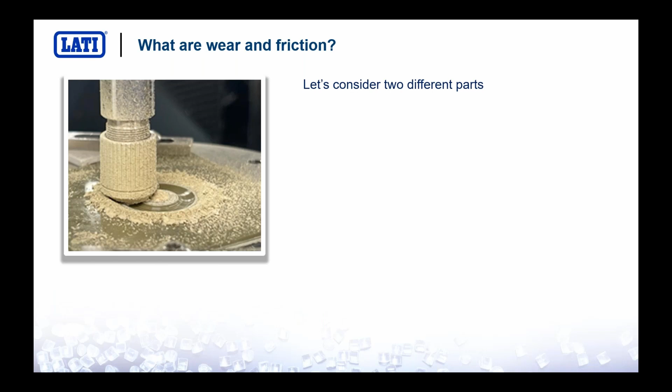So what is wear and friction? Let's introduce it as a scientific phenomenon. Consider two planes sliding one against the other. You have to put them in contact and in relative motion, so one slides onto the other. Let's suppose we apply a force pushing one onto the other. We can experience and define friction as a non-conservative force opposing motion and dissipating energy as heat.

We can experience this in our all-day life—when we rub our hands, we can feel the heat from sliding one onto the other. That is friction: it dissipates energy as heat, and it is a non-conservative force. What does non-conservative mean? It means its work is not related only to the starting point and end point, but also to the way the force works, to the amount of movement this force is actually doing.

Wear is a dissipation of mass—not a destruction, of course, but a dissipation of mass—meaning you actually remove some mass because of the aforementioned phenomenon.

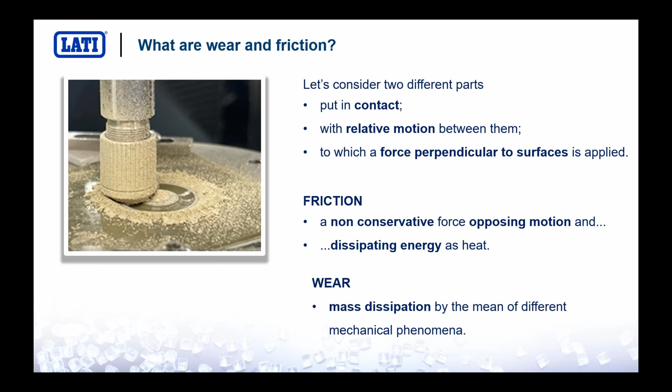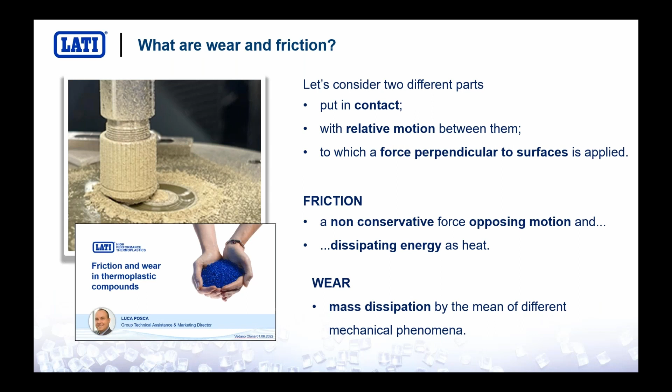If you have any interest in going more into detail about friction and wear, I strongly encourage you to look at our previous webinar from last year, 2022. I personally took care of that one, where we gave a better introduction to friction and wear in thermoplastic compounds. But today this is not the topic, so it will just be a very short introduction.

Let's try to better understand what friction is and how we can solve any friction-related problem. If we zoom into the surface of the two sliding parts—the orange one and the gray one you see here—you will see that any kind of surface, even the flattest one you can imagine, actually shows some roughness. This roughness is the source of the issue.

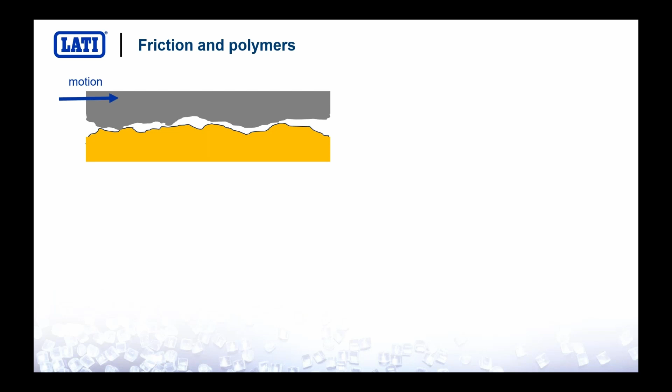If we imagine putting the gray part into motion onto the orange one, and we apply some vertical force, indicated with Fn, which could be the load or the pressure, we will experience a resistance to motion—that is the Fr indicated there. The ratio between the resistance to motion and the vertical force is defined as the friction factor, indicated by the Greek letter μ.

The friction factor is a pure number, whose value is below 1, of course. Normally it's something between 0.4, 0.5, 0.6. With some plastics, it can go down to 0.1.

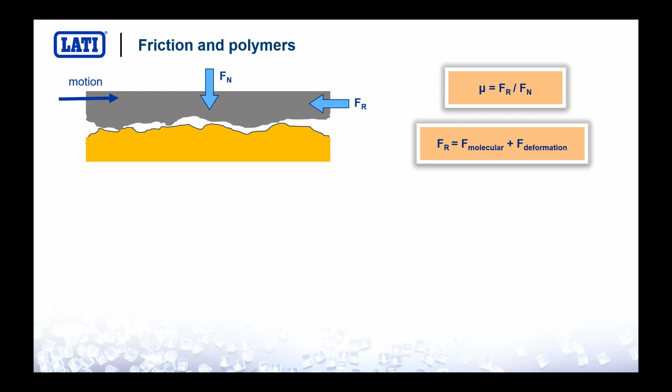If we take a closer look at resistance to motion, we find it is achieved by means of two major contributions. The first one is due to molecular interaction, and the second one is due to the plastic deformation of all those peaks and crevices you see on rough surfaces.

The molecular contribution is due to molecular interaction, meaning the two materials tend to stick together because of electrostatic forces, van der Waals forces, and any kind of electrical interaction between the molecules. This gives rise to the so-called adhesive contribution, meaning the two parts tend to stick together.

The other contribution is related to material deformation. The peaks and crevices come into contact with one another, and you have to spend some work, some energy, to deform the peaks. This creates resistance to motion—this is the mechanical contribution, and it is extremely important in both wear and friction phenomena.

So once we understand where friction comes from—mechanical and adhesive contribution—how is the friction factor generated? The friction factor depends on a lot of different parameters: normal force, so pressure, the roughness of the surface, the relative speed, temperature of the environment, thermal conductivity, and so on.

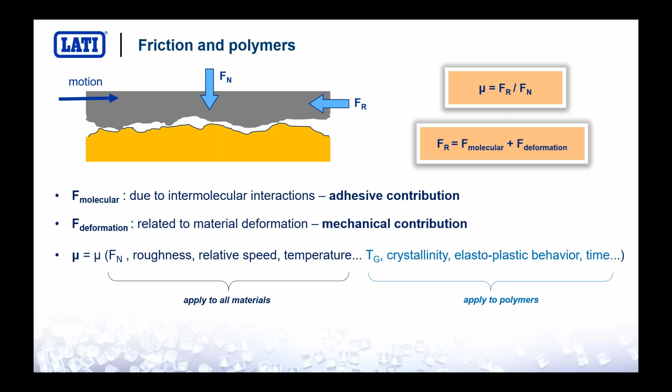So you can easily imagine how hard, difficult, and unreliable all the tests we make to measure friction can actually be. You see how many different parameters we have to control in order to provide some kind of reliable description of friction.

One question can anyhow be easily answered: what is the perfect material? How could we conceive a perfect material, how should it work? For sure, we understand that the perfect material must have very, very low adhesive behavior—it must show very poor chemical activity. And it should be a material that we can easily deform, easily shear. This could be the perfect material.

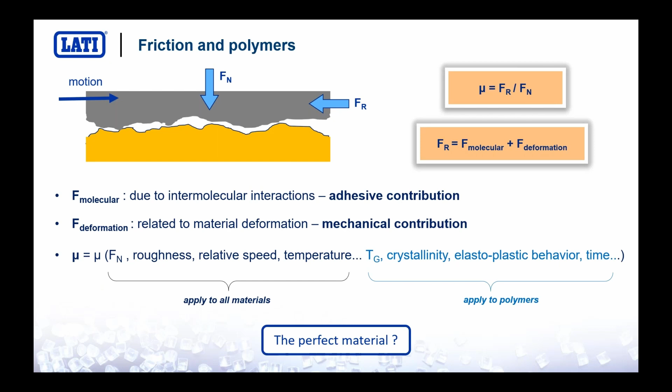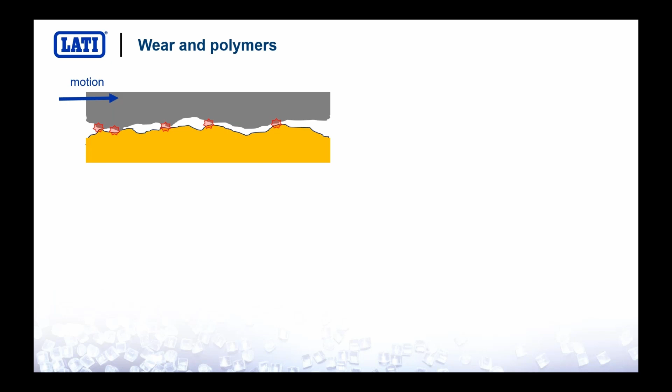Let's move to wear. Wear is more or less originated by the same phenomena. We look at our surfaces, apply motion as usual, and we see that in some areas, those peaks and crevices and crests get in touch. They weld onto one another and break as the motion forces the gray part to slide onto the orange one. We can evaluate the wear rate as a proportion including friction factor.

Wear rate becomes lower as the material gets harder and as elongation at break and stress at break become higher. So we can say a perfect material should have a very low friction factor, should be hard, and should require a lot of work—related to elongation at break and stress at break—to be broken.

So we can also introduce an adhesive component of wear, related to the tendency of the molecules of the gray part and the orange part to stick together. When they weld onto one another, they are forced to break as soon as there is motion. Then there's the abrasive component of wear, due to the so-called third body—a very hard body rolling between the two. Then we have fatigue wear, promoted by the poor capability of the material to resist applied cycles and stresses in cyclic applications. And then corrosive wear, promoted by the environment.

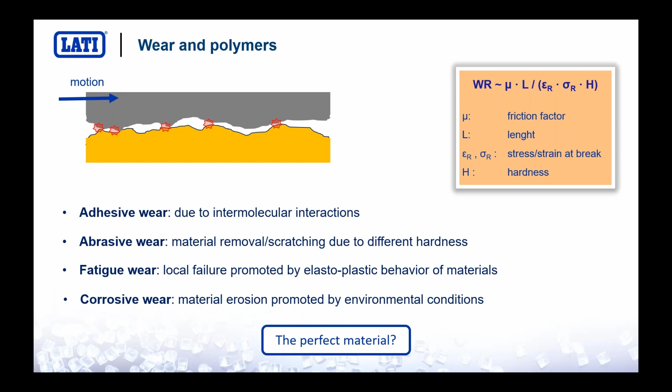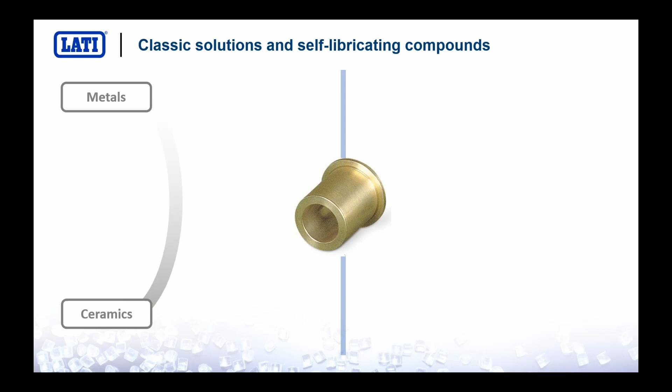Now, what are the solutions that today we can find on the market? We have the classic solutions: metals and ceramics. We can improve the behavior of metal and ceramics by adding some lubrication or specific coatings, very hard coatings like silicon carbide or aluminum nitride and so on.

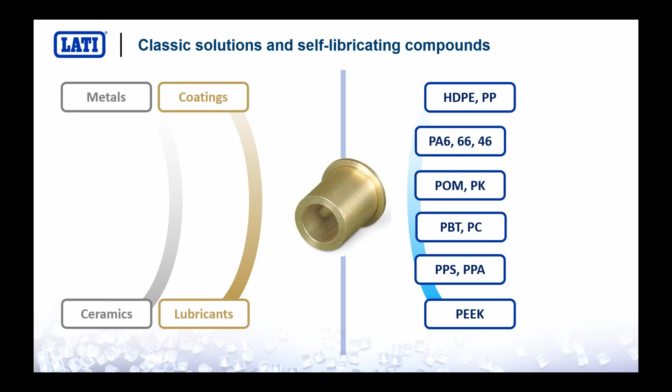As LATI, we work on the other side: the side of plastics. So we select very intrinsically self-lubricating plastics like PEEK, acetal, polyamide, PBT, or polyethylene, and we introduce some extra fillers which improve and boost the tribological performance of those plastics, like graphite, molybdenum disulfide, silicon oil, carbon and aramid fiber, and PTFE. PTFE is actually the best performing additive that we can imagine.

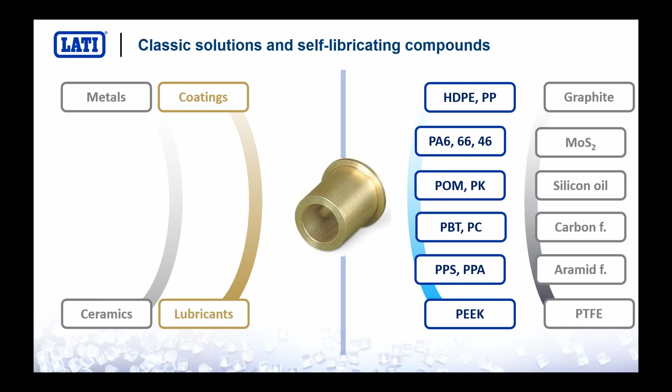Now we are going to find out why. Let's meet this guy, let's meet PTFE, and let's try to understand why PTFE is so well performing. PTFE is a very interesting molecule coming from the polymerization of tetrafluoroethylene. Tetrafluoroethylene can react with a very highly exothermic reaction, meaning that the polymer born after this polymerization reaction will be extremely stable.

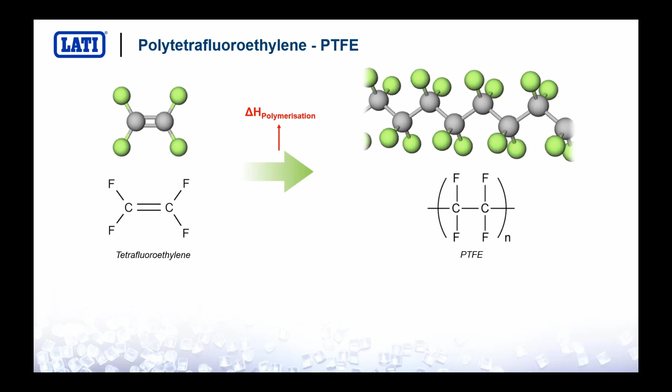The molecule in itself, here it is, PTFE, polytetrafluoroethylene, is a very, very, very interesting molecule. It is a very big one, very big, very heavy. Just to give you an idea, the molecular weight of PTFE is 100 times higher than the molecular weight of nylon 6,6, meaning that you have a very huge, very bulky, very long molecule.

You have a very high crystallinity index. PTFE is born with 95%, which is then reduced down to 50% during the subsequent processes. But in any case, it is a very highly crystalline polymer because of its nature. It's a very linear and homogeneous molecule, and it's very high density. So it's very heavy, it's very big, and it's very crystalline.

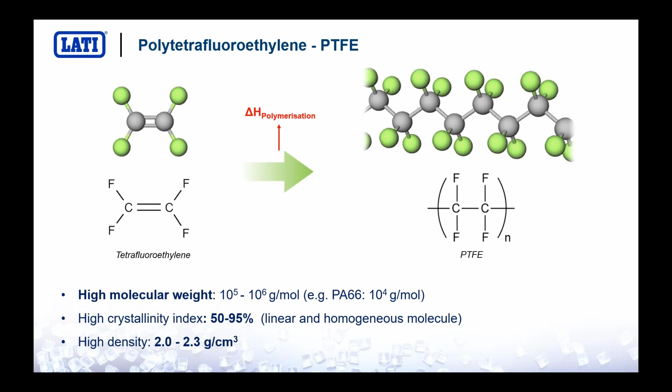But this is not enough to understand why PTFE is such an excellent performer. We have to look a bit closer at the bonds of the PTFE molecule. Let's jump into the PTFE molecule.

If we give a closer look at PTFE, we will find out that the carbon-carbon bond, the covalent bond between carbon atoms along the backbone of the PTFE molecule—the gray spheres you see there—is extremely stable. It requires about 350 kilojoules per mole just to be broken. But it is nothing when compared to the carbon-fluorine bond. The carbon-fluorine bond is among the most stable covalent bonds that you can find in nature. Its energy is higher than 400 kilojoules per mole, and this is an extremely short and stable chemical bond.

It is also extremely polar because fluorine just needs one electron to be perfectly stable, and it takes this electron from the carbon atom, giving you a strongly polar dipole, as we say. What does this mean? It means you have a very short bond with very high energy needed to break it, and this will lead the molecule to be absolutely stable—even if you try, it is extremely difficult to break it.

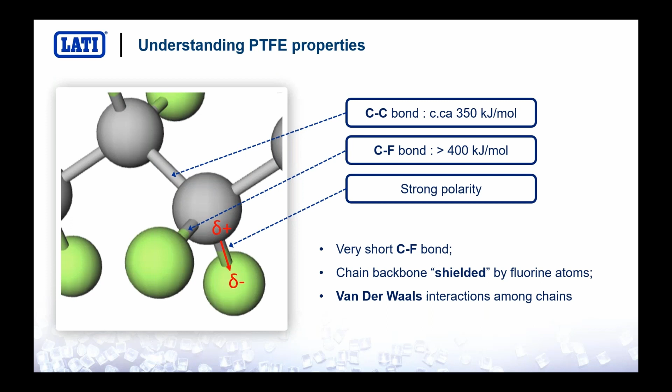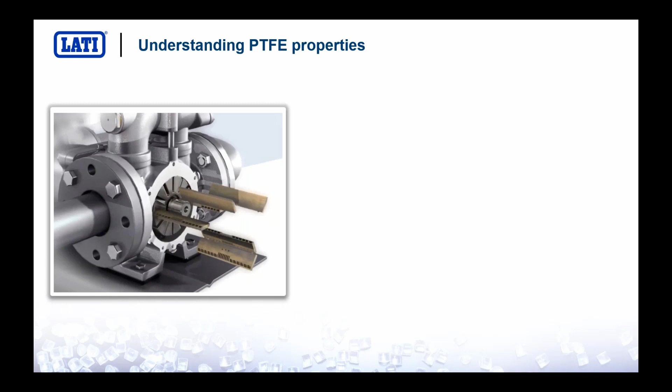Now we have understood that the chemistry of PTFE is the reason for its outstanding performance. What does it mean? When you have such a stable molecule, you will have an extreme chemical inertia. What does chemical inertia mean? It means there is no way to break it, no way to stick onto it, to glue it, to paint it, no way to overmold it. Nothing can actually stick to PTFE.

There's a very low surface energy, so it's very hard to wet it, very hard to apply any glue or any other chemical substance. And it has a very high thermal stability, because the chain of the PTFE polymer is extremely stable in itself, it does not want to break. This means the product will have a very low friction factor because we almost have no adhesive force, and a very, very low amount of work to shear it. So it's a very weak solid.

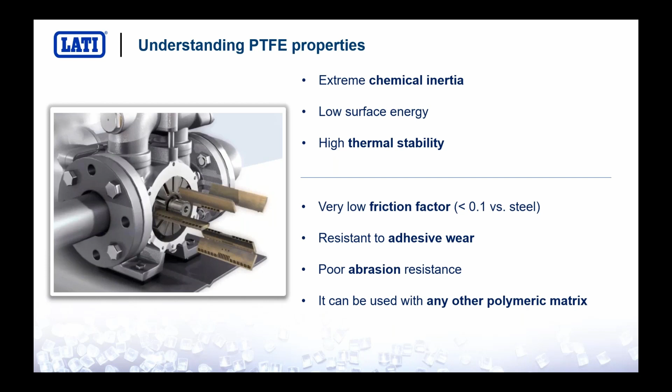It's a very weak solid. It is extremely resistant to the adhesive component of wear, but it is not resistant to the abrasive component of wear. But all in all, thanks to its overall properties, it can work very well with any other polymeric matrix. So you can actually disperse PTFE in any polymer, from polypropylene to PEEK, and you will always have outstanding performance.

Now let's try to understand how it works in the compound. First, I have to focus your attention on a collateral effect of PTFE. In case you want to think about replacing PTFE-based thermoplastic compounds with non-PTFE-based thermoplastic compounds: PTFE has a huge effect on shrinkage. Remember this is absolutely important.

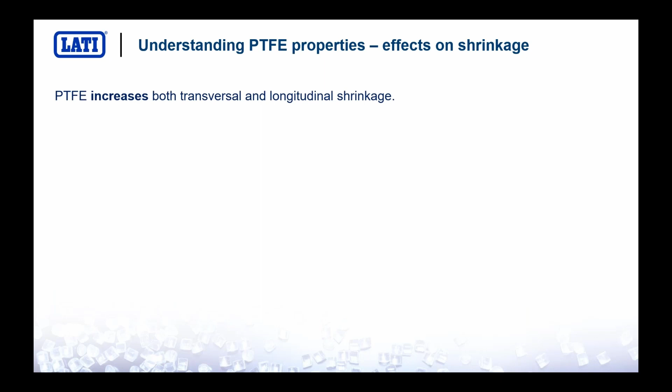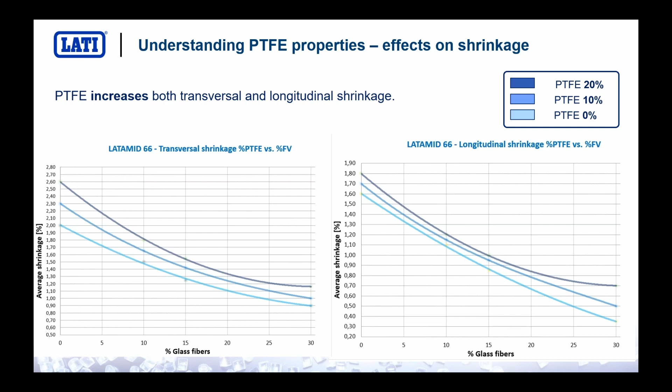PTFE increases both transversal and longitudinal shrinkage. The more PTFE you put in your compound, the higher the difference will be between unfilled and PTFE-filled compound when it comes to shrinkage. So I would say forget about replacing one-to-one PTFE-based polymers with PTFE-free solutions, because you will have bad surprises when it comes to shrinkage. But this is just a technological issue. What is really important to us is to understand how PTFE actually works in our compounds, so we can understand how to replace it.

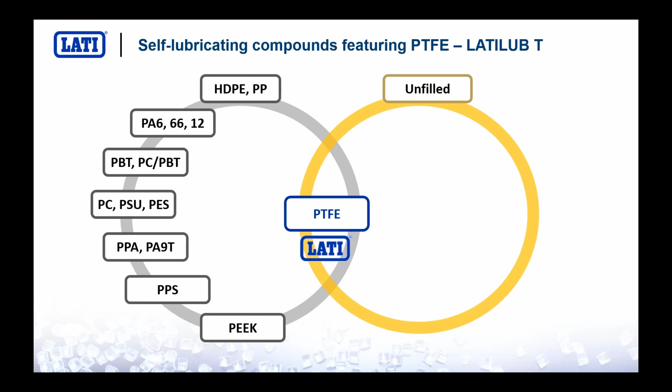Today, LATI produces a wide range of PTFE-based thermoplastic compounds. We use any kind of thermoplastic-based polymer, from polyethylene to PEEK, and we use PTFE with a huge amount of different additives. We use it unfilled, with silicone oil, glass fibers, carbon fibers, graphite, aramid fibers, and ceramics. If you check our website, you will find hundreds of so-called LATILUB compounds containing PTFE as a main self-lubricating additive, because it works absolutely fine. Today you can rely on plastics that can be used from 80 to 300 degrees C, featuring PTFE as a main self-lubricating additive.

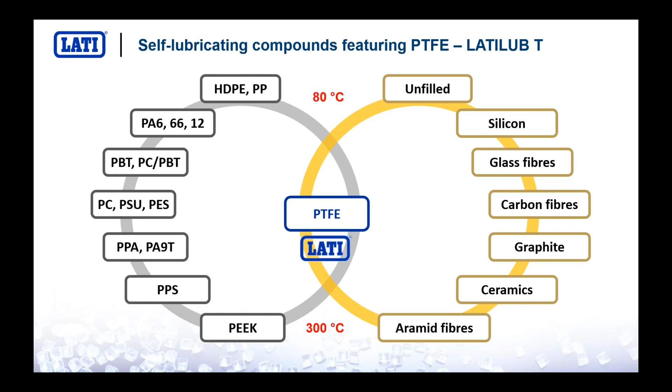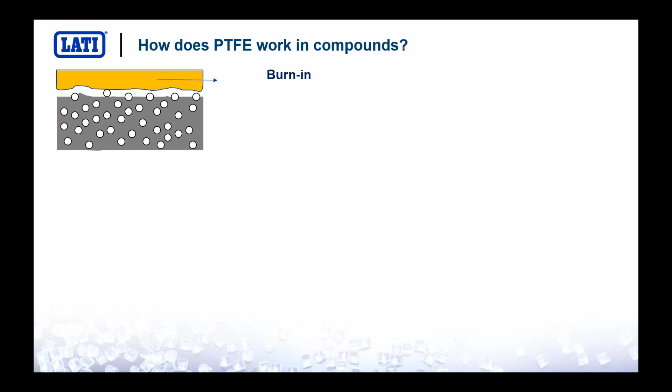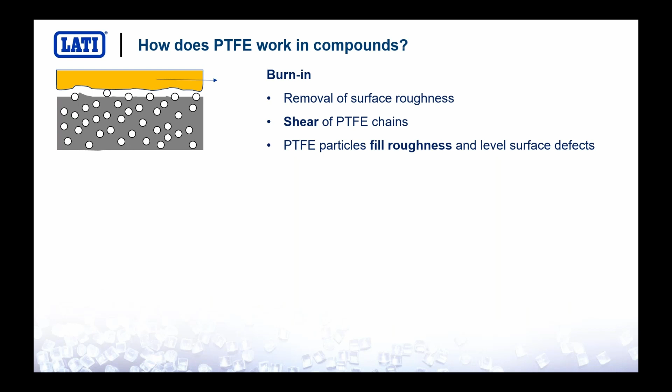At the beginning, you have some burn-in phase. The first step is the removal of surface roughness - you just remove all the crevices, peaks, and valleys on the surface. Then you start shearing PTFE chains. Remember, PTFE chains are kept together only by very weak van der Waals forces because of the very high chemical inertia. So you can actually shear the crystals of PTFE, shear the molecule, and laminate it onto the surface. You can shear it and move it into the valleys, leveling the surface just by rubbing PTFE onto the surface because of shear.

If we zoom into one of those white bubbles, you will see that because of the mechanical stresses, you can actually promote chain breakages in the PTFE chains. What happens when you break the chain of a polymer? You create radicals - extremely active chemical species, prone to react very quickly - and these chemical species will react with the orange part. This means the PTFE radicals will stick onto the orange surface, promoting the so-called film transfer.

So you will have PTFE not only on the surface of the gray part, but also on the surface of the orange part. You will have PTFE on PTFE with extremely oriented chains. This solution works great for high loads and low speed, and works fine from 5% to 20% of PTFE in the thermoplastic matrix. That's exactly how PTFE works: very poor adhesion and film transfer. These are the keywords.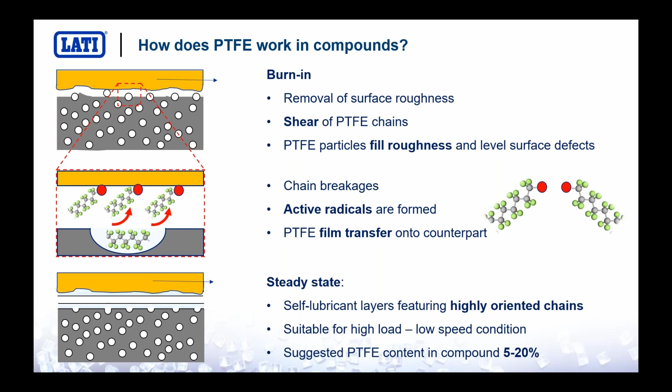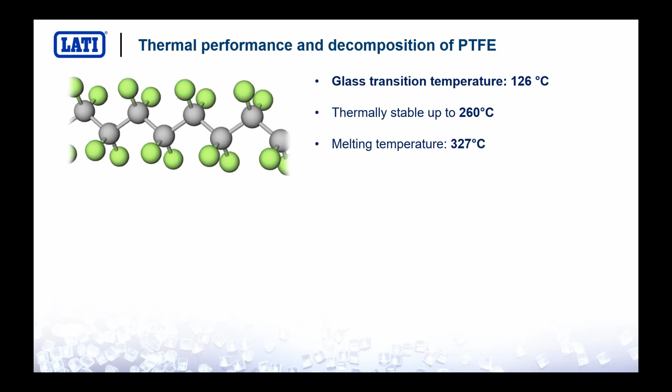Now let's come to the bad news. What happens when you heat up PTFE? I told you the molecule is extremely stable. That's exactly the problem. PTFE has a glass transition temperature of 126 degrees C. It's stable up to 260. It should melt at 327, but actually it doesn't melt because of viscosity. But from 350 on, it starts thermal decomposition, and that's the problem.

You have a full depolymerization above 650 degrees. And what happens when PTFE decomposes? When PTFE is broken because of temperature, it will release a lot of very nasty substances.

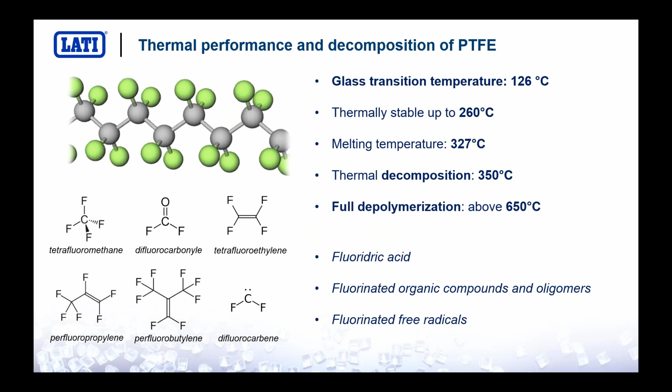First of all, fluoridric acid, which is extremely corrosive and extremely dangerous for people's health. Then it will release a huge amount of very nasty oligomers, so-called oligomers, meaning small molecular, fully fluorinated oligomers. Here are some of them. And of course, it can release also fluorinated free radicals, which are nasty and extremely reactive as well. This is the problem. These substances are the bad news.

What are the so-called PFAS then? The PFAS are just what we have been talking about, the so-called poly or perfluorinated alkylic substances. It's just the amount of guys that we have just met in the slide before. I will introduce you the first PFAS, the perfluorooctanoic acid.

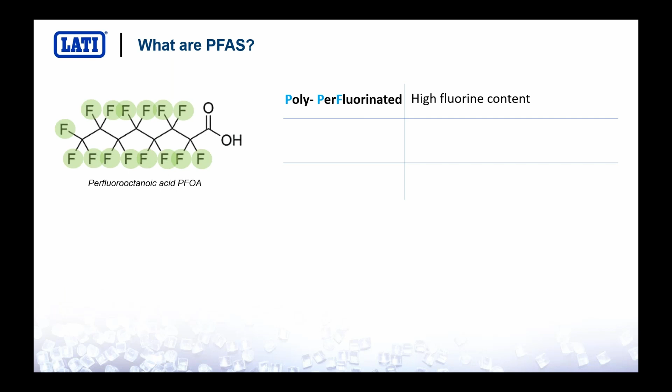Perfluorooctanoic acid is a fully fluorinated organic acid, so it is poly or perfluorinated, meaning high fluorine content, alkylic substance, meaning that the main chain is coming from an aliphatic hydrocarbon, and substance, meaning that it will be defined as such even if it is alone or in combination with other substances.

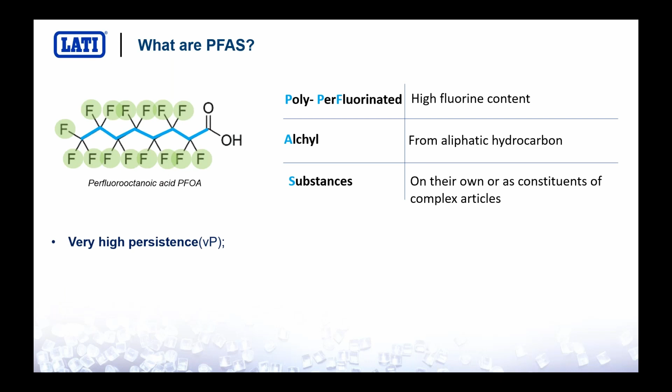What are the main problems related to these byproducts of PTFE degradation? They are extremely persistent, meaning it is almost impossible to destroy them because of their inherent extremely high stability. They lead to bioaccumulation. They are very mobile. You can find them everywhere all over the world. You can actually find it in the North Pole. They are extremely toxic and ecotoxic, and they have the so-called ubiquitous presence, meaning that they are everywhere.

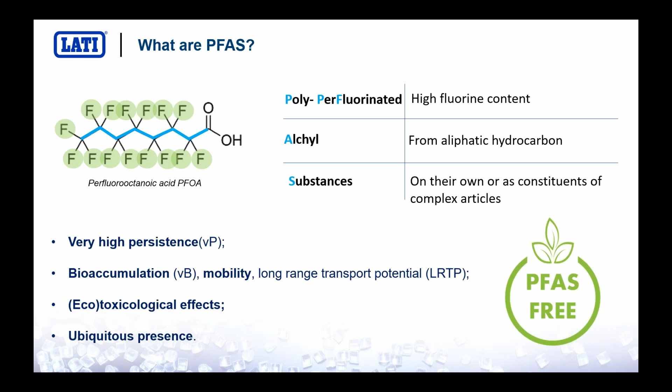So you have nasty substances, very toxic, extremely stable, very mobile, that can be found everywhere. And that's the reason why today we are asked for PFAS-free solutions. Very nice question, very difficult answer. Now let's give a look at the status, the state of the art of the rules.

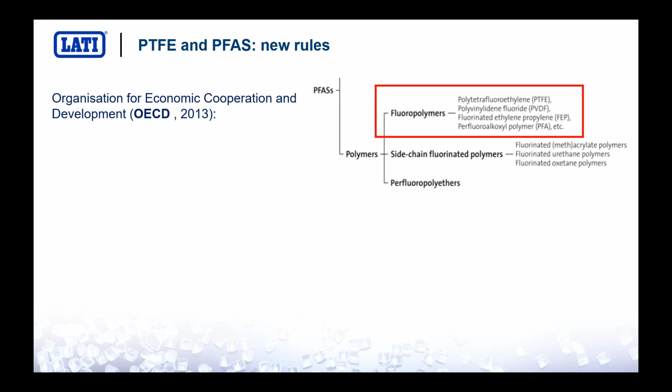Fluorinated polymers have been identified as PFAS in 2013. You can see this is one of the branches of the diagram describing what is PFAS, but you can easily see that fluoropolymers are identified as PFAS. So PTFE, PVDF, PFA, and so on, ECTFE, and so on. All these fluorinated polymers are PFAS.

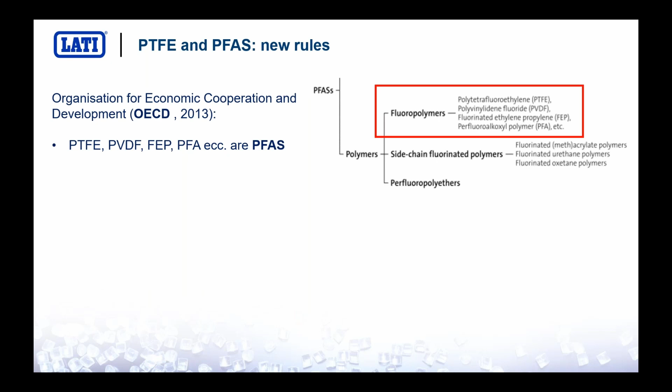So what is going to happen to perfluorooctanoic acid is more or less happening also to PTFE. PFOA was introduced in the substances of very high concern list in 2013, 2014. Then there was a new regulation in 2019. In 2020, there was the first limit of perfluorooctanoic acid content in PTFE, just to give you an idea, 25 parts per billion. And today we have 5 European states pushing for a further restriction covering a wide range of PFAS, including fluoropolymers.

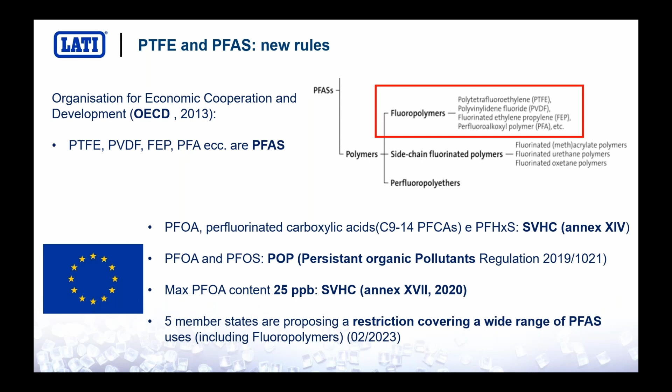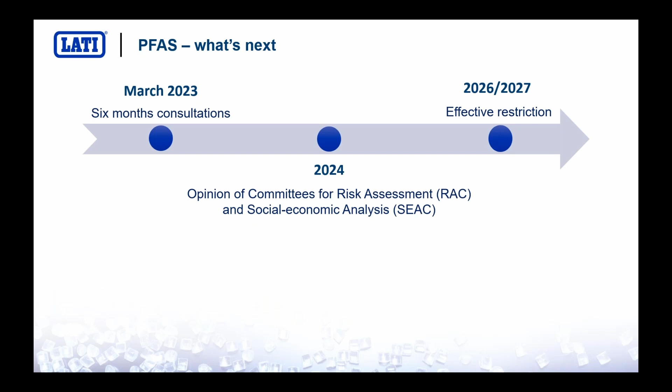What is the roadmap? The roadmap is very tight. March 2023, we had the first 6 months of consultations, which have just ended in September. Now in 2024, there will be an assessment of all socio-economic issues related with the ban of fluorinated polymers. But between 2026 and 2027, it is very, very keen that there will be the introduction of restrictions on fluorine polymers.

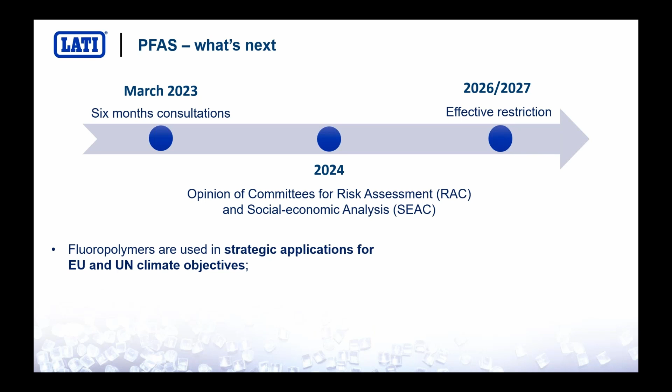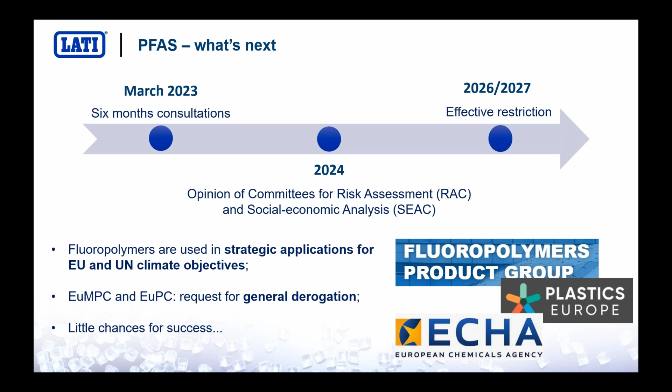Of course, there is lobbying. We are trying to make people understand that fluorinated polymers are extremely important for many strategic applications for Europe and UN climatic objectives. So we're actually lobbying to try to convince these people that fluorinated polymers are very hard to replace, but the hope for a general derogation on fluoropolymers is really very low. There is really a little chance for success. So by 2027, we are almost sure that PTFE will be forced to be removed from our plastics. And this is a big issue.

Now let's make our ideas clearer. Let's imagine that we have to replace PTFE today. First of all, we have to understand what is needed for plastics to create a successful self-lubricant polymer. We need extreme chemical inertia. First of all, we need a plastic, an additive which is not prone to react with anything.

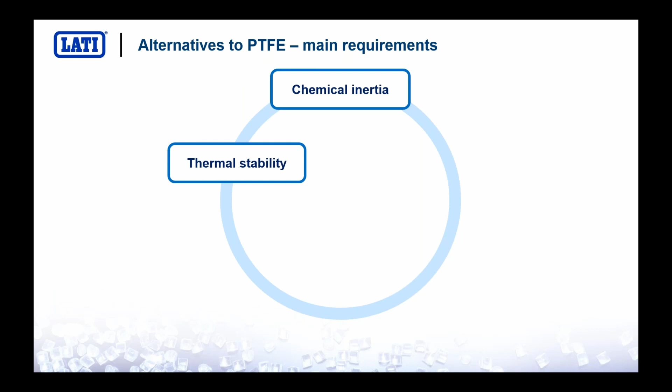Then we need thermal stability. We need good processability. We need good viscoelastic and mechanical properties, of course. And then we need an acceptable price versus performance ratio. I put this as the last problem, but you know, for many situations, it's the first issue.

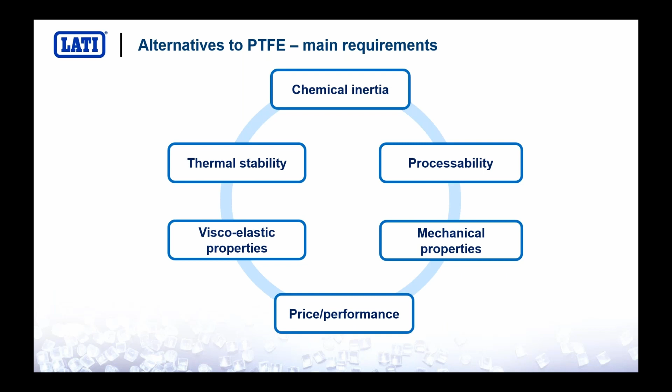Let's see what are the closest solutions. I'll start with the most popular and easiest one, already being used by LATI and many of our competitors for a few years: ultra-high molecular weight polyethylene. It's a polyethylene with a very big chain, a very funny name, but with a very high molecular weight and very high crystallinity. Its density is lower than PTFE, but it also shows outstanding chemical inertia, so we have most of the properties of PTFE.

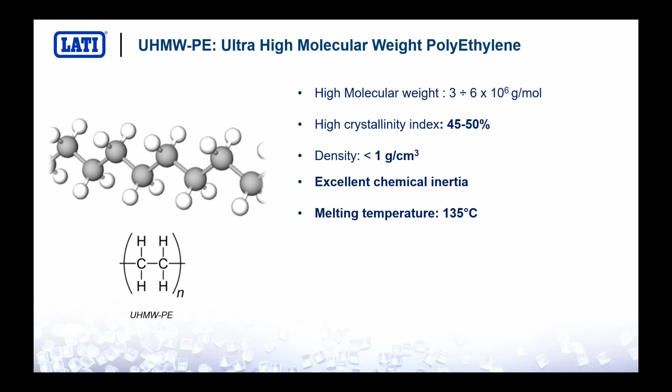What is LATI doing? LATI has already been compounding ultra-high molecular weight polyethylene for a few years. We have solutions based on nylon 6, copolymer 6.66, polyolefins, polycarbonate, polyether sulfone, and PPS. First, bad news: we have a much lower number of resins where LATI has tested ultra-high molecular weight polyethylene as working. I repeat, this is LATI's experience, not global experience.

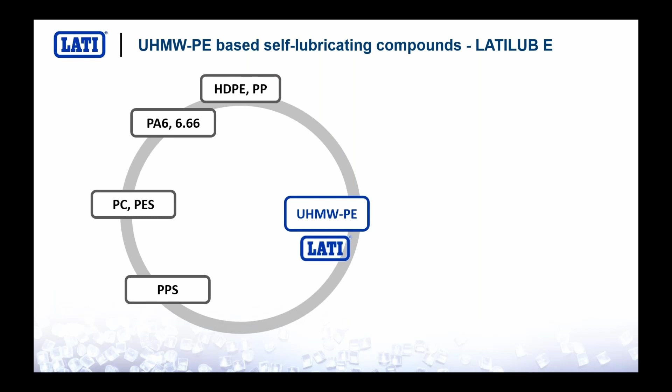From a filler point of view, we've worked with ultra-high molecular weight polyethylene in silicon oil, glass fibers, carbon fibers, and aramid fibers. We're now exploring other synergies, but the combinations are much lower than those available for PTFE. Also, the available maximum temperature of these self-lubricating plastics is lower, because it's very difficult to properly disperse ultra-high molecular weight polyethylene in high temperature plastics like PEEK, PPA, or polyphenylsulfone. It's very difficult to achieve proper dispersion of this additive, and this leads to poor performance as a self-lubricating additive.

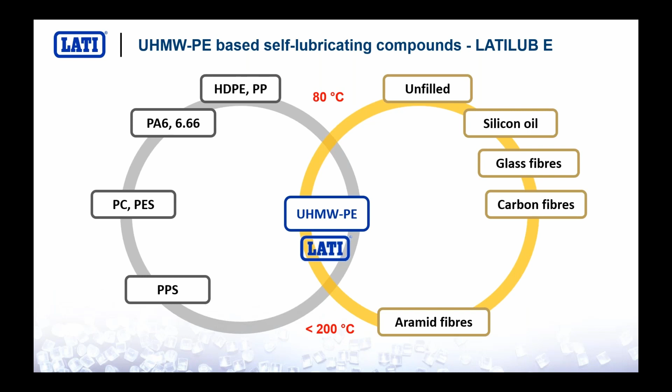Let's look at the numbers. I compared very similar formulas - same base resin, same amount of reinforcement, and same amount of additive filler. Remember these percentages are by weight, and PTFE has a density twice that of polyethylene, so by volume you have half the volume of PTFE compared to ultra-high molecular weight polyethylene. What you see is that from a friction point of view, polyethylene works fine, but as far as LATI's experience is concerned, we were not able to achieve satisfactory wear performance. So friction is okay, wear is not okay.

Why is wear not okay? We're strongly convinced the main issue is dispersion of the filler. So it's a technological issue, not a chemical issue.

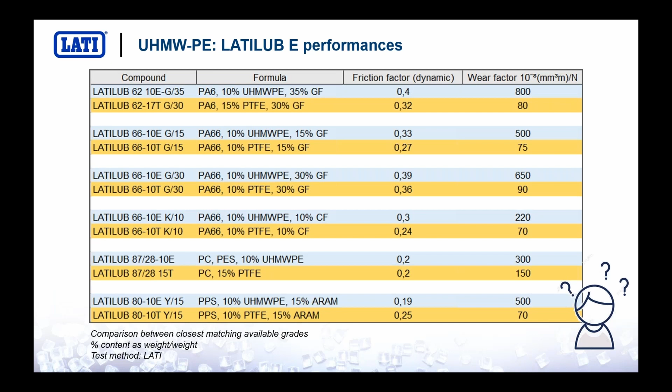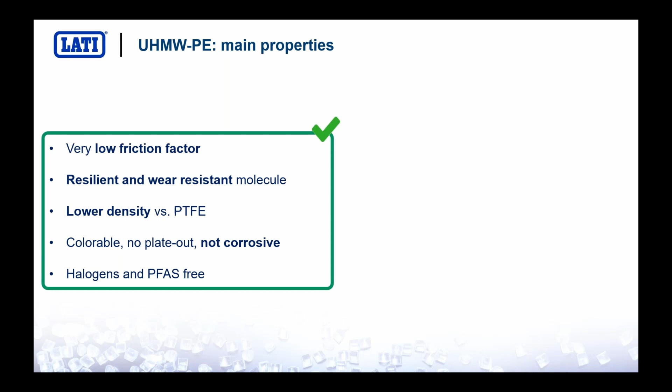To sum up ultra-high molecular weight polyethylene: the molecule itself has a very low friction factor, is very resilient and wear resistant, has a very low density versus PTFE, and has many other good properties. It's colorable, does not plate out, is not corrosive, does not contain halogens, and is PFAS free. A lot of very interesting properties.

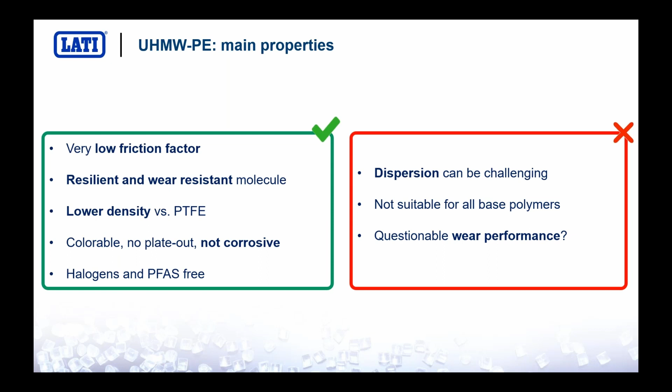On the contrary, the disadvantages: dispersion can be really challenging, it's not suitable for all base polymers, and wear performance to date has not been as satisfactory as PTFE - though maybe this issue is due to dispersion of the additive or the testing method.

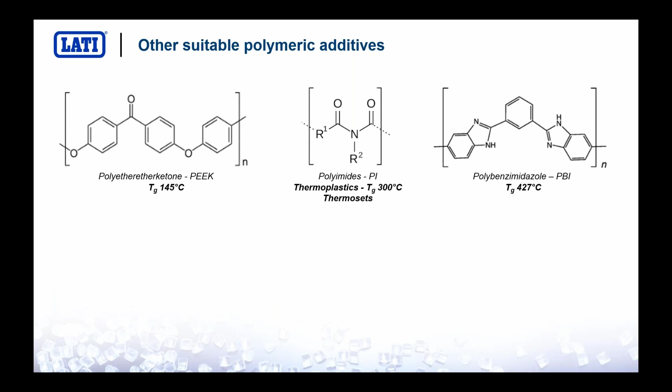Now let's try to understand what other solutions could be viable. The most promising ones we're already working on are polymer-to-polymer replacements - replacing PTFE with other polymers showing similar behavior: PEEK, polyimides (thermoplastic or thermoset), polybenzimidazole. These molecules share with PTFE excellent chemical inertia, excellent thermal resistance, are intrinsically self-lubricant, and suitable viscoelastic and mechanical properties. Too bad they are extremely expensive and their performance and processability are still to be tested.

But in my humble opinion, this is the most promising future for PTFE replacement.

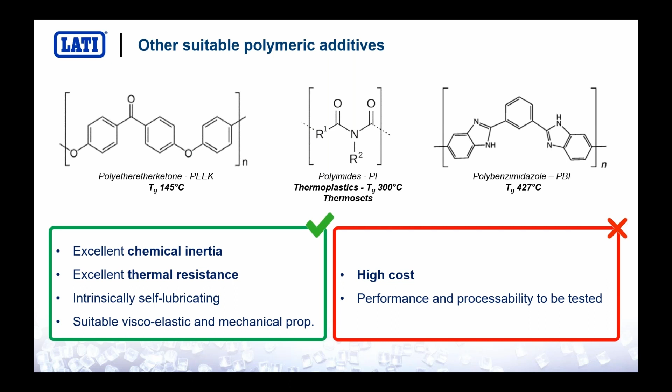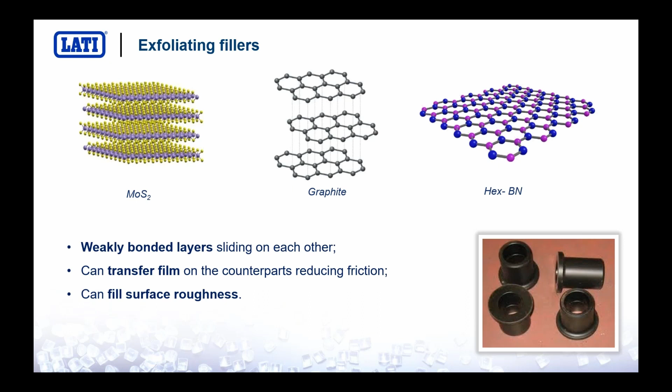Why do these fillers work? Because they are made up of weakly bonded layers, which can slide one onto the other. Being so mobile, you can experience the self-lubricity of these fillers. Because of the sulfur, they can transfer onto the mating part, and you can also get a nice filling of the surface. Using this kind of exfoliating filler, you can even the surface of the two sliding planes.

When comparing performance, I wanted to compare 1% molybdenum disulfide with PTFE. In this case you have more or less the same friction factor, but the wear factor cannot be compared—the wear behavior is much worse. So PTFE is also outperforming molybdenum disulfide in this case.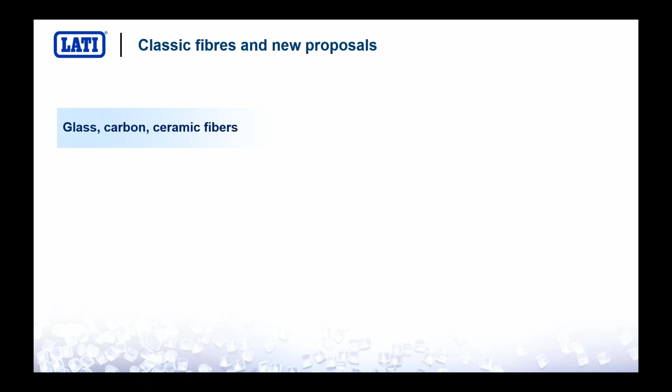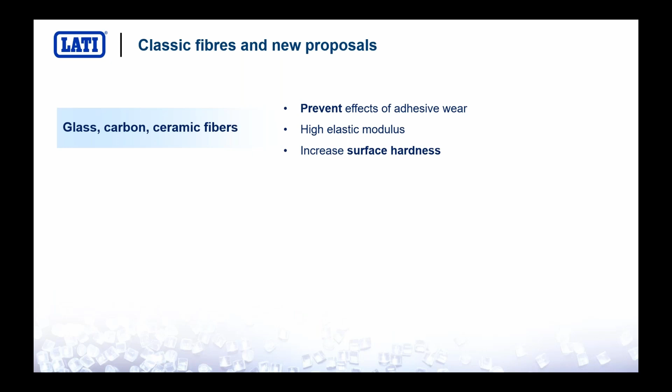Then we have fibers. There is a lot of development on the fiber side: classical fibers, carbon, glass, and ceramic fibers. They work very well by preventing the effects of adhesive wear—they keep the two mating surfaces apart. They are very hard, they increase surface hardness, placing themselves between the two surfaces.

They work fine up to 15–20% content. Above that, they can create issues because they can easily detach and promote third body wear, and this can be a problem.

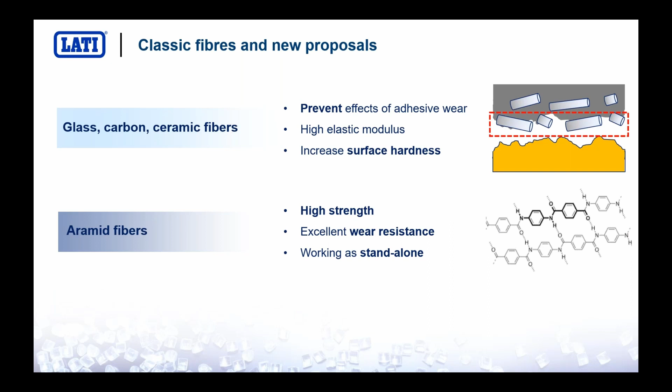Then we have aramid fibers. Aramid fibers are a special kind of polyamide. They have very high strength and high wear resistance, and work very well as a standalone. We are already using it at LATI—that's exactly why they work so fine. They're very promising, but I think today aramid fibers must be studied from a synergy point of view, and we'll see later what this means.

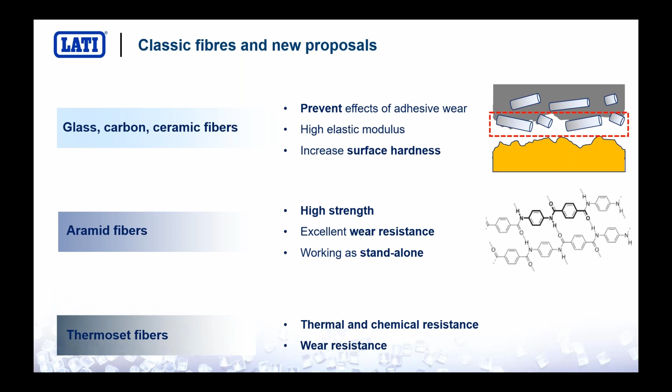And then we have an interesting new thermoset group of fibers, polyimide fibers, which can be dispersed in the matrix, working more or less like aramid. Very interesting thanks to their very high thermal and chemical resistance. This is the third field of development for PTFE replacement.

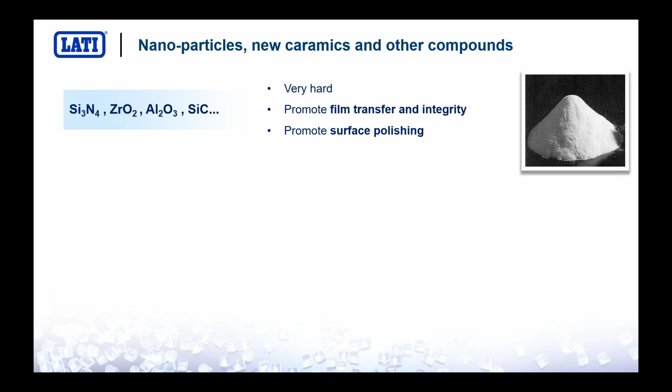Then we have a huge family of ceramics, nanoceramics, nanofibers, nanotubes, and so on. First of all, we have very hard nitride, oxide, and carbide molecules available, and these molecules are also available in nanoscale. They work very well by promoting surface polishing, creating a very clean and flat surface by micro polishing. They can also promote film transfer, and being extremely hard, they can prevent wear.

The problem here is that these fillers can be very aggressive to your equipment—to the extrusion machine, to the molding machine, to injection molding tools.

Then we have a new family of sulfides, not only molybdenum disulfide, but also copper sulfide, tungsten sulfide, and zinc sulfide. Very interesting and promising, all sharing this layered structure. They can transfer onto the metallic surface. We are working quite a lot on these alternative sulfides because some of them show very interesting synergy with other fillers.

Then we have the nano stuff: nano mica, nano clay, nano titanium dioxide, nano zinc oxide, and so on. Nano fillers work very well because of their dimension—they are very small and can work down to the molecular segment, but they are very sensitive to filler content and can impact the mechanical properties of the compound quite a lot.

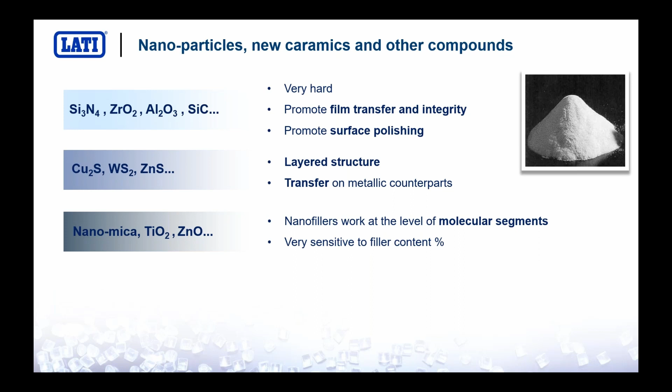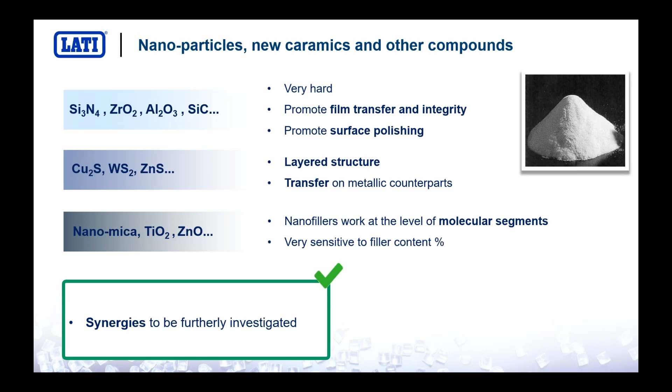To summarize the behavior of these fillers: very interesting, but I would say the most interesting part is the synergies that can be studied to improve the behavior of a primary friction factor reducing additive. You have to mix this primary additive with some of these fillers and see what happens.

The downside is high cost, affecting mechanical performance, and then there are huge issues when it comes to handling, processing, and end-of-life safety. For these nano-engineered particles there is no restriction until now, but for sure we'll have a hard time as soon as we learn more about what happens at end of life—when they are disposed of, what happens when you release these nano-engineered ceramics into the environment.

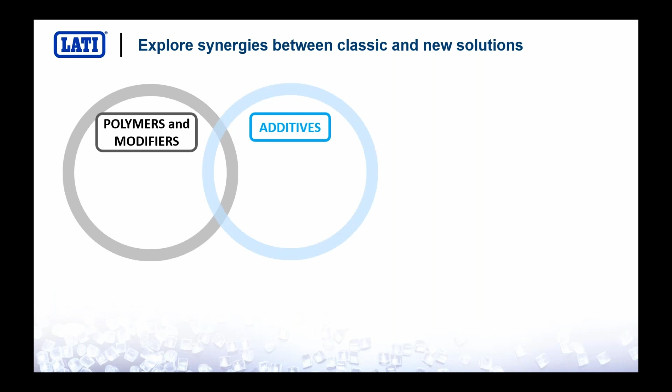And then we have to explore the synergies. Synergy, I would say, is the keyword of this webinar, because you cannot replace one-to-one PTFE, but you can somehow get close to its performance by exploring the synergies between polymers, new polymers, and polymer modifiers which are already available on the market, additives, as the ones I've shown you before, and reinforcements.

Some of these synergies are already known. Just to give you an idea: PTFE and silicon, PTFE and aramid, molybdenum disulfide and glass fibers, graphite and carbon fibers, and so on. These are known synergies. You can already find plenty of self-lubricant plastics featuring this kind of synergistic combination.

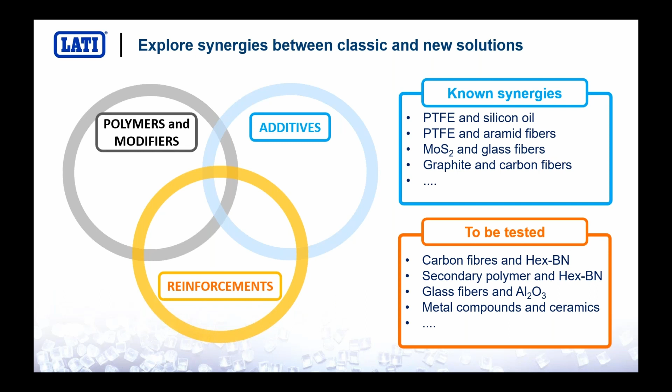But then we have a huge amount of new synergies which have to be explored and which are actually being explored right now at LATI's or by our competitors, of course. Some of them: carbon fibers and boron nitride, secondary polymer and boron nitride, glass fibers and alumina, some metal compounds and ceramics, and so on. Very interesting, huge potential in these synergies. That's exactly where we have to work.

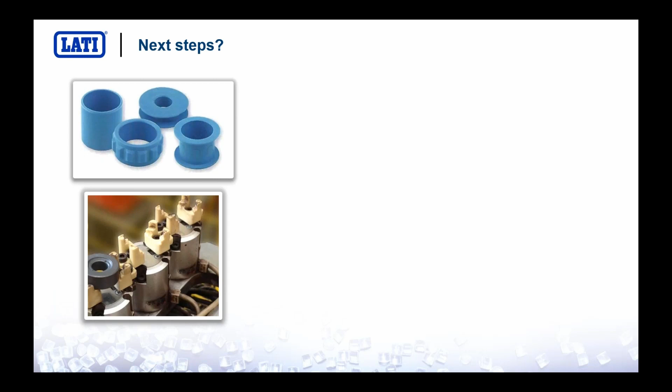Which may be the next steps then? For sure, we know that by 2027 PTFE will have a hard time. But what can we do between today and 2027? I would say that we can start trying to reduce the PTFE content, let's say below 5%. These will make no exception when the PTFE restrictions kick in. Even 1% or 0.something percent will be PTFE, so it will not be possible to use it anymore.

But in the meanwhile, we can try to understand how we can reduce the amount of PTFE and still have a working product. So we have to work on the synergies between PTFE and other additives. Just to give you an idea, PTFE and the secondary polymer, PTFE and ceramics. And we are already working on this field, and we already have some very interesting products.

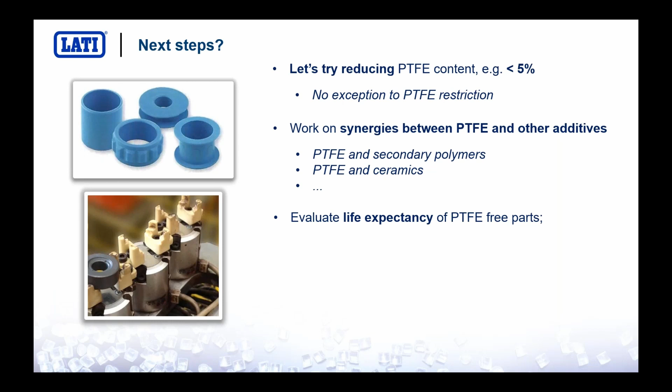Then I would say we have to evaluate the life expectancy of PTFE-free parts. It's not the compounder's job, it's the end user's job. But what happens when you remove PTFE from your compound? It may happen that the life expectancy of your part is reduced by 50%, 60%, 80%. Is it worth it? Does it make sense to have a working part that can last only one-tenth or so of a PTFE-filled part?

I wouldn't say so. We have to evaluate the sustainability of PTFE-free solutions, keeping in mind that today you can find recycled PTFE, which is available and reduces quite a lot the global warming potential.

And then we have to evaluate very, very carefully the alternatives to PTFE, because they can hide very serious processability issues, and I would say even more serious safety and health issues, especially when it comes to thermosets or some kind of funny nano-engineered ceramics, which can actually be nasty stuff.

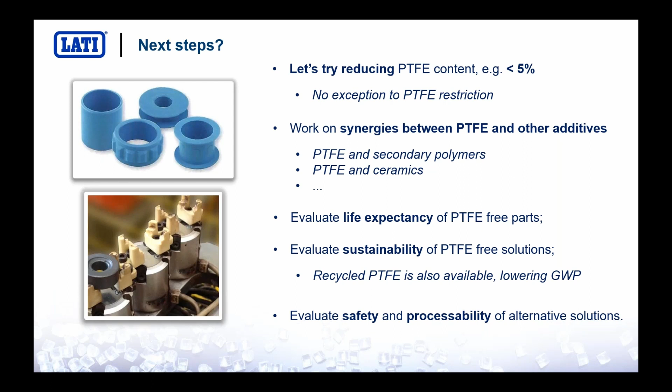So let's draw our conclusions. What does PFAS-free mean for the moment being? It's a big issue because PTFE shows an outstanding set of properties. And when I say outstanding, I mean outstanding. PTFE cannot be replaced one-to-one with anything right now.

Derogation for PTFE, I wouldn't say so. It seems quite unlikely. So between 2026 and 2027, PTFE is very likely to be put under the scope. I would say it will have a possible restriction.

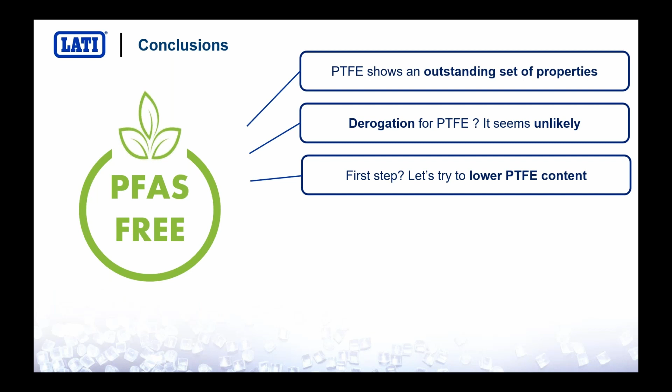As a first step, we may try to understand if it is possible to lower the PTFE content, and in the meanwhile, we'll make a nice and healthy exercise trying to understand how PTFE works and how we can actually replace it. Ultra high molecular weight polyethylene works fine, but not on any kind of thermoplastic matrix and not for every kind of application. It works fine for some friction issues, but for wear, as far as LATI is concerned, we have not been able to find exciting results.

Many alternative solutions are on the table, very interesting synergies to be explored. Many are soon to be released on the market, exciting numbers, but remember PTFE is still very far from being emulated or caught.

Last but not least, I would say that in the meanwhile, it will be also a very healthy exercise to revise the requirements of the applications, because if we imagine removing PTFE, some applications will have big issues. So maybe it would be the right time to start re-engineering some parts, trying to consider if those wear requirements and those friction requirements are actually that necessary, or maybe we can somehow re-engineer our product.

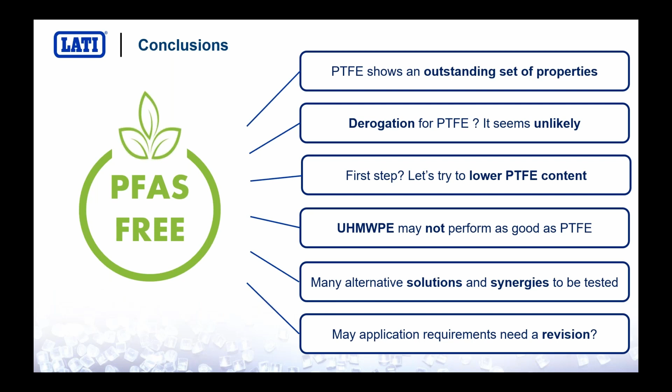I really hope I was able to give you an acceptable introduction to what is the status of PFAS, PTFE, and the possible solutions that could pop up on the market in the next couple of years.

Just to finish my webinar, I would say that LATI and LATI's competitors are working hard on this. Now and then you see some news popping up, this guy has an outstanding product, these other guys have an outstanding product, but for the moment being, there is no groundbreaking solution. We are working hard trying to understand mostly which are the synergies that can actually replace PTFE, but for the moment being, there is no exciting news, I would say.